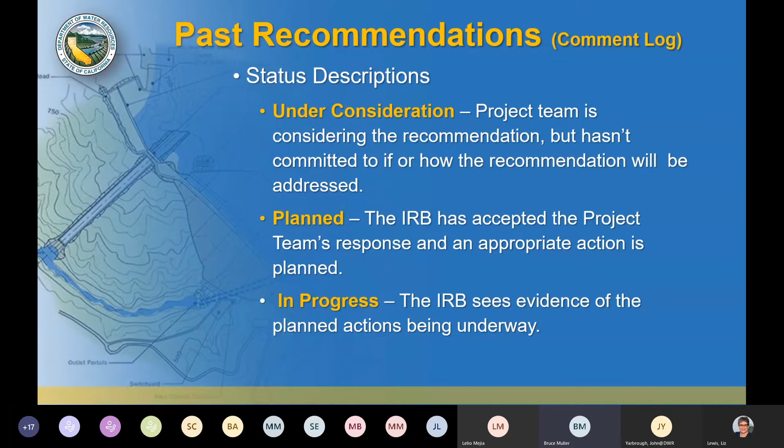Next slide. If we've closed it, then the IRB has reviewed and confirmed that the project team's planned action has been completed and adequately addressed.

If it's not adopted, that's just an indication that the project team didn't adopt the recommendation and has provided some sort of an explanation or will be providing an explanation.

I think there were a few in this category that the scope of the analyses were well beyond what could be accomplished under the CNA study, and so those have been queued up to be, they're underway, but they just won't have the results in time to be incorporated into this particular report.

And then finally, we had one that we classified as superseded simply because we wanted to clarify a prior recommendation. So next slide.

So here's the quick summary. We don't include the recommendations from IRB number 8 because the project team hasn't had a chance to respond to those yet, as they just got our report.

And so you can see overall, we're pretty pleased on the IRB to see that out of 73 recommendations through IRB number 7, 53 of those we've actually considered to be closed. 13 in progress, a couple planned, no longer have any that we would consider under consideration other than those that were made in IRB number 8.

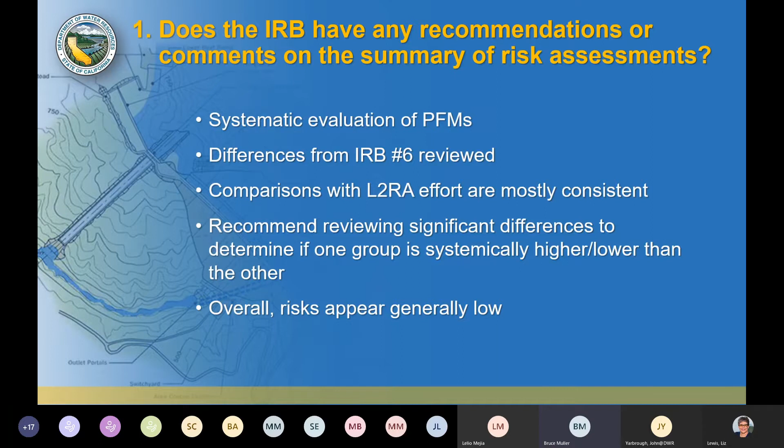Second question that was asked is, does the IRB have any recommendations or comments on the status of reports? First of all, just general comments. We certainly appreciate the use of color to identify the potential failure modes and risk levels and where they fall.

We asked the team to reconsider the use of the term recommended measures, as it might convey a level of definitiveness that from what we heard was actually not intended. And then we suggested identifying documents and data sources that were used to characterize the existing conditions.

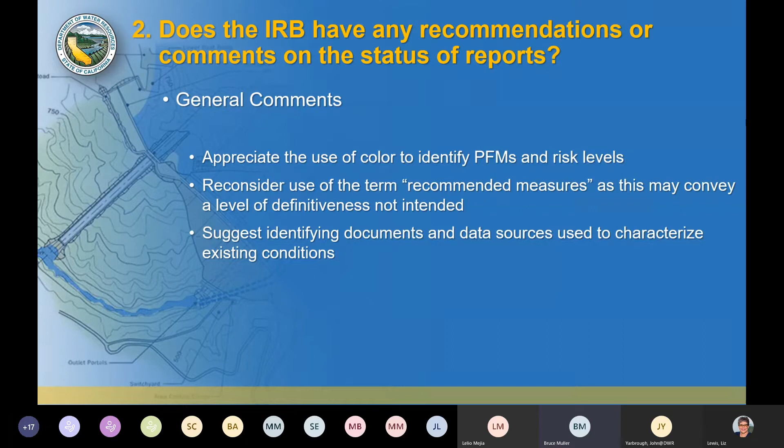In terms of the public draft report, as of, let's see, I think even as of today, we've only seen a draft of the table of contents on the public report. But from that, it appears that it's got the appropriate content. We just recommended that they include a discussion of risk and what's called ALARP, or as low as reasonably practicable, principles, so that there would be some context for anybody reading that report.

In terms of the final overall project report, we felt like the report was in an advanced stage of preparation. We did have a number of editorial comments that we provided separately, mostly things that we didn't feel rose to the level of being in our formal report, but we saw it as an opportunity for the team to clean some things up.

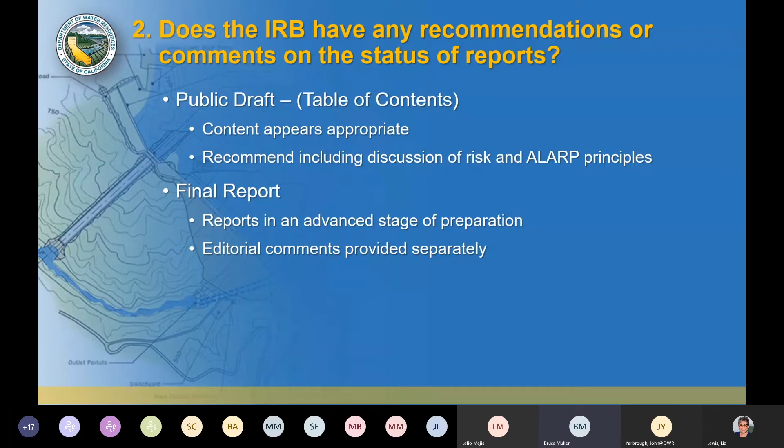All right, on the task 1 report, this is the emergency spillway task. We indicated that emphasis should be added regarding the importance of the Hyatt power plant. The issue here is that operation of the emergency spillway potentially could lead to a backwater effect that would essentially require the closure of the outlets at Hyatt—and that's your emergency evacuation for the reservoir.

The task 4 report, this is the various low-level outlets at the dam. We indicated there's a need to emphasize the role of a low-level outlet in reducing risk for all PFMs. In essence, having low-level outlets provides an opportunity to intervene in most of the other potential failure modes if they were to begin to show signs.

We also thought it was important to identify that the existing low-level outlet capacity does not meet DSOD guidelines. I will, however, qualify that by the fact that the DSOD guidelines currently apply to new dams. So while they're commonly applied to new dams, Oroville has never been tested by a significant seismic event, and so it might be desirable or prudent to meet the guidelines.

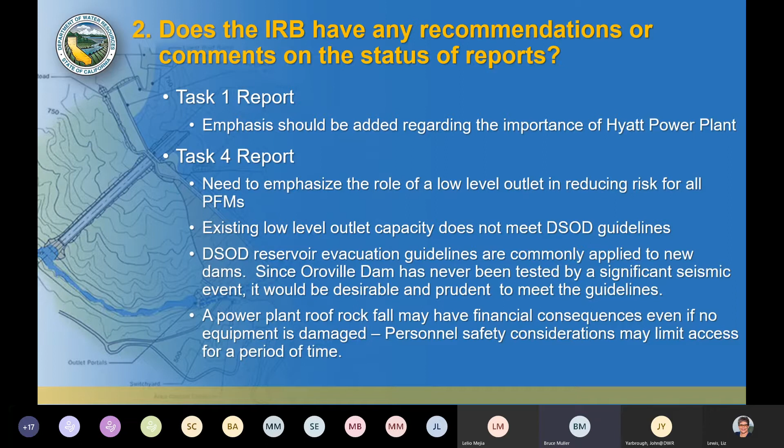The Task 5 report, which is the embankments. This was again one of the areas where we wanted to see the studies identified that contributed to the CNA study. One example of that would be the study of the vegetated area.

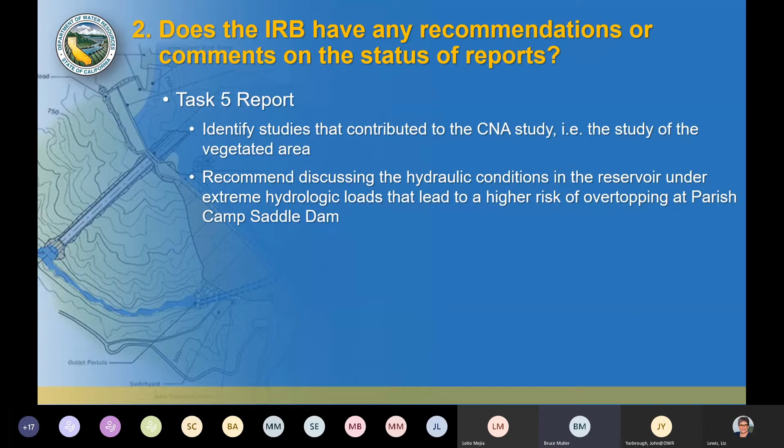We recommended some discussion of the hydraulic conditions in the reservoir under extreme hydrologic loads, because there's a unique phenomena that occurs in the arm of the reservoir by Parish Camp Saddle Dam, whereby it's possible that in that arm, due to flow conditions, the reservoir could actually be about a foot higher than at the main dam itself. That's something that'll come into play as you hear some more of the presentations today.

The third question that was asked of us was, does the IRB have any recommendations or comments on alternative plan formulation and recommendations? We felt DWR had used a good structured process for formulating alternative plans. We supported their effectiveness scoring approach. In essence, this is just a way to go through the alternative plans and give them weighted scores according to their objectives.

We suggested that instead of trying to whittle it down to just a few alternatives presented to decision makers, we thought the objectives and consequences are so diverse that it would be important to present the DWR decision makers with the full suite of plans that had been formulated, in order to allow for a more rich set of choices going forward.

And in IRB number 7, we recommended expedited implementation of some of the low-cost measures that were part of all alternative plans. Specifically, this was a group of about 3 measures that had been recommended that were relatively low cost, where implementing them could actually be maybe even less than further studies, or if not less, certainly not much more than the cost of doing additional studies on these measures.

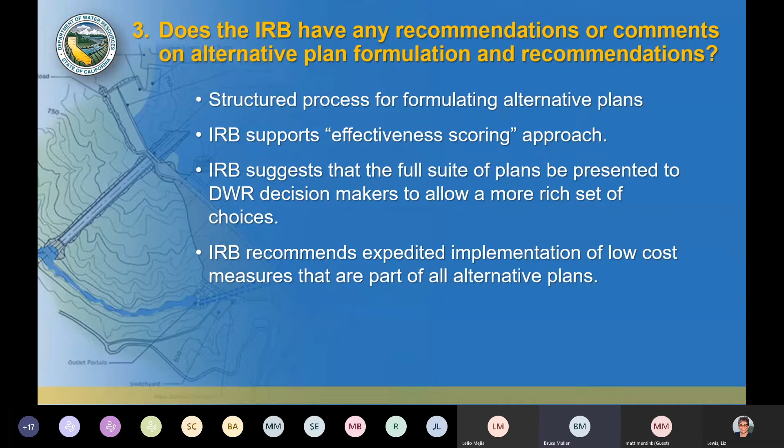The fourth question was, did we have any recommendations or comments on the comment log? And as usual, we updated it and provided that.

There was one item of note, that from the first IRB meeting, recommendation number 16, the climate change studies won't be ready for inclusion in the CNA. Our suggestion was that the discussion in the CNA really focus on how climate change would be addressed as plans or measures were advanced. Just giving some context of how that would be done would certainly be helpful.

Did we have any recommendations or comments on the schedule and next steps, which we did not.

Does the IRB have any other recommendations or comments, kind of the general catch-all? We saw this as an extraordinary effort to process a large number of potential failure modes, risk reduction measures, and alternative plans.

We really felt that DWR has created for themselves a model that could be used for other facilities. The reports they're developing provide the framework from which they can take a good, solid look at all of their facilities. But at the same time, not everything needs to be done to the same scale that it's been done for Oroville.

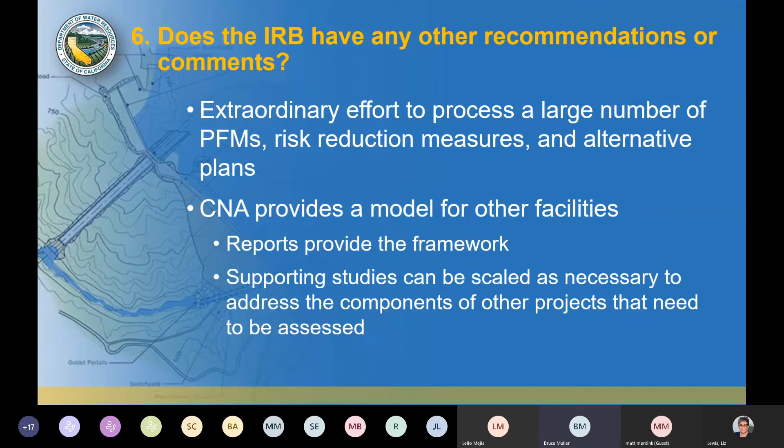And I think we would concur. I don't think we saw any of those 11 that we felt should have been incorporated into plans.

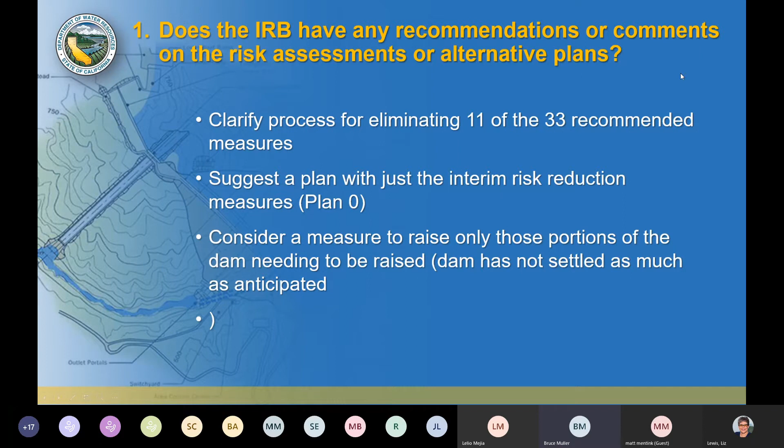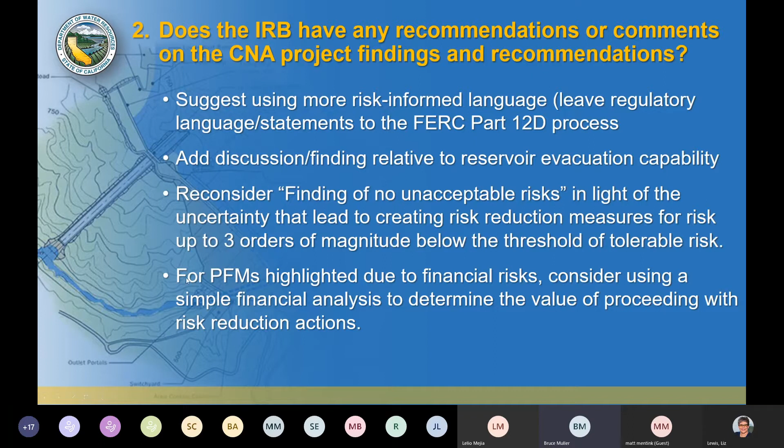Did we have any recommendations or comments on the comment log? We reviewed the master comment log and updated it with the status, then provided that to DWR. Next slide. Did we have any recommendations or comments on the reports?

Again, this is just about explaining it. We think it makes complete sense that primarily the risks are coming from life safety and financial consequence, and so those are the things that really stand out in the report. But we think it's just as important to indicate why some of the other consequence categories don't show risks that are anywhere near as high as these.

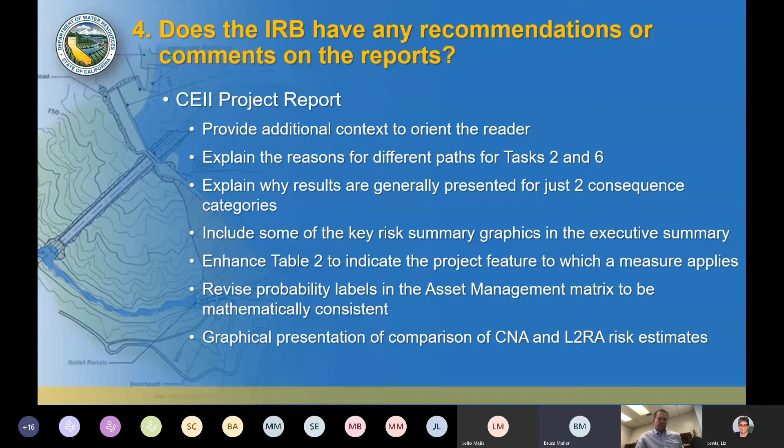And then we also asked for a graphical presentation of the comparison of the CNA and the Level 2 risk assessment risk estimates. We had seen that in an earlier meeting. We thought that was extremely useful, but we did not see that in the draft reports that we had available to review. Next slide.

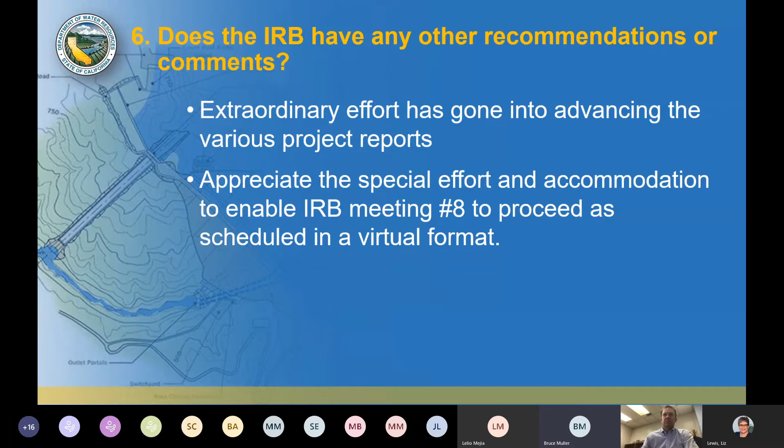And with that, that's the end of our report. Certainly open to questions. Maybe one question. I understand that Rune had submitted some questions to DWR either late yesterday or this morning. And while most of those questions, I think, really apply directly to DWR to answer, I think there was one in there, or several of them, that alluded to the notion of a factor of safety.

And I would just caution everybody to be very careful with the notion of a factor of safety. I've seen many cases in dam safety where when you begin to really look at things in a risk context, you start asking many more questions than are asked through standard deterministic analyses that lead to factors of safety. And you can make errors both ways with factors of safety, because in a large number of cases where factors of safety are computed, they are only computed for those things that we know how to analyze. And it's a significant risk to believe that just because somebody has computed a factor of safety, that is adequate for a full understanding of the risks posed by a dam.

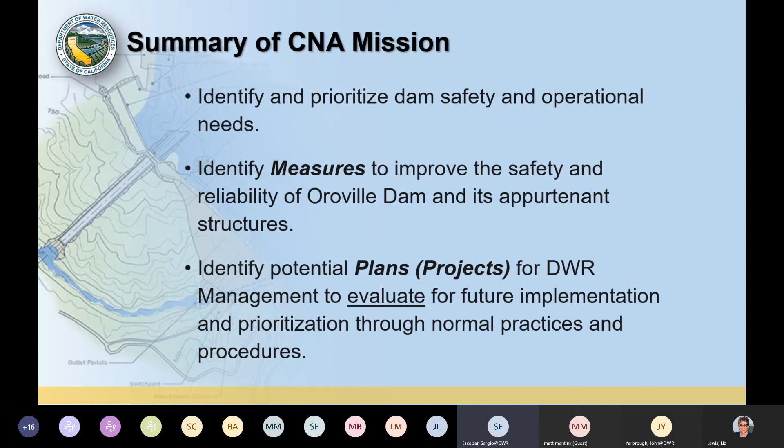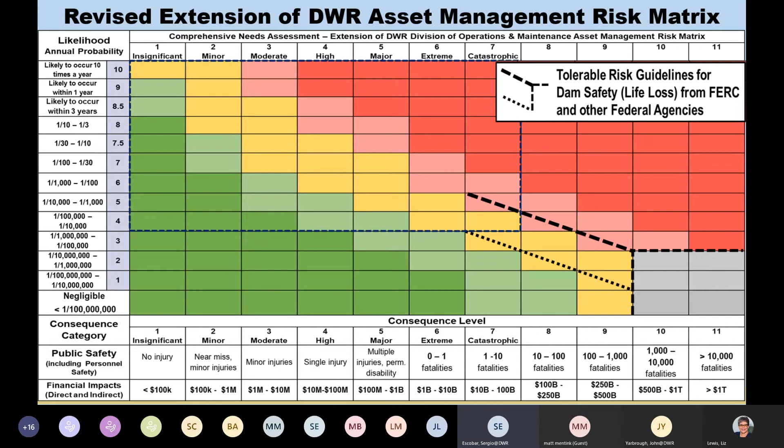So these are our final results from all of our work. We ended up doing a full analysis on 129 PFMs. 54 of those, approximately 42%, plotted in the negligible line. Additionally, the IRB for meeting number 8 asked us to separate those failure modes that were financial and those that were life-loss oriented. Out of the 129, 105 were dominated by life loss, and 24 were basically financial.

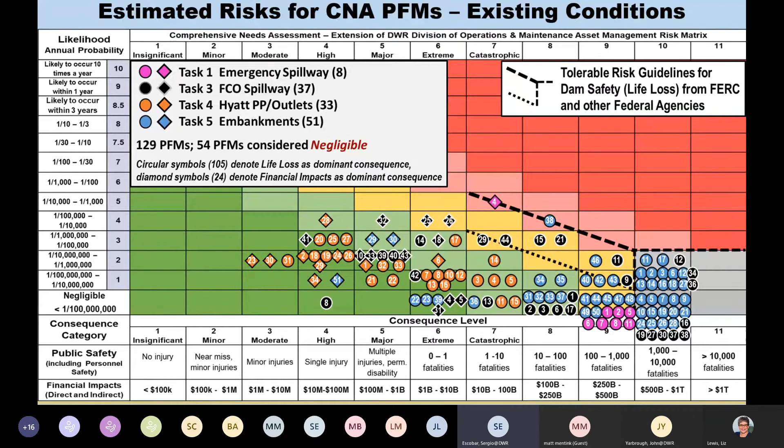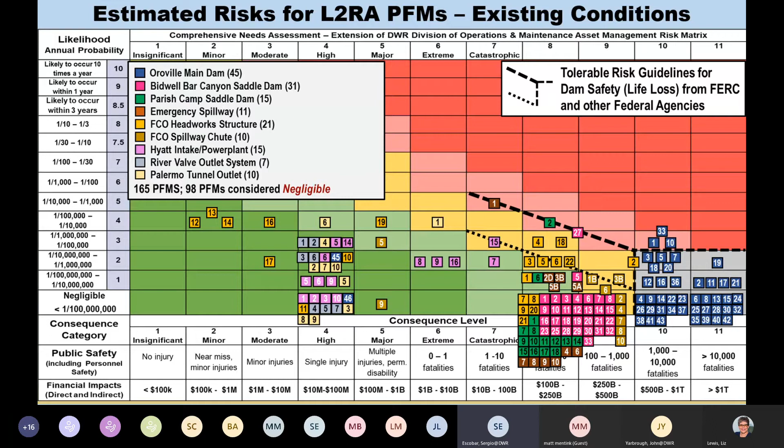Next slide. Now moving on to the measures, we used a total of 31 failure modes, or potential failure modes, to develop our measures. 33 measures were developed as a result of these 31 failure modes that were used.

Next slide. So what were our major findings? Number one, no dam safety deficiencies were identified - these were FERC and DSOD standards. From speaking with the regulators, I think they're changing this standard a little, so my next slide reflects what our wording is going to be changed to going forward, per IRB meeting number 8 comment.

Secondly, for a handful of PFMs that are the highest, additional analysis is required. One of these is the flood control outlet structural analysis. That analysis actually started before the CNA started, and it's expected to be completed either the latter part of this year or early 2021. As soon as that information comes in, we'll be able to go back and look at what those results tell us in terms of any potential deficiencies on the structure.

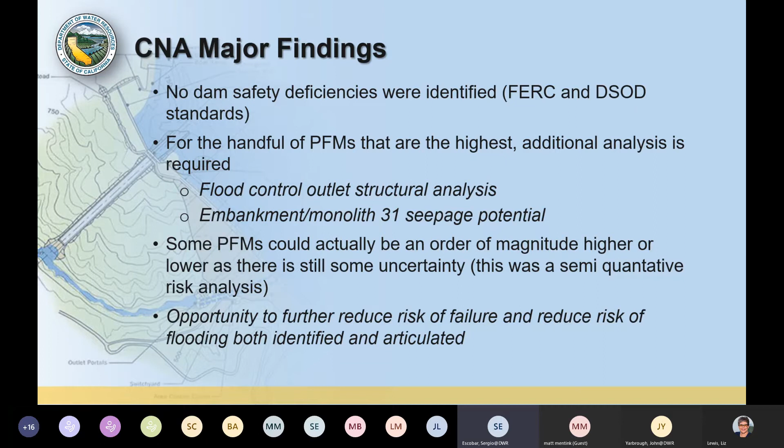So after meeting number 8, our revised dam safety finding language is going to change to read: all of the risk estimates made by the CNA teams fell into either broadly acceptable or tolerable risk zones. No unacceptable risk. Those that might fall above the tolerable risk line were identified. As a result, no dam safety issues were identified that exhibit a need for immediate risk reduction actions.

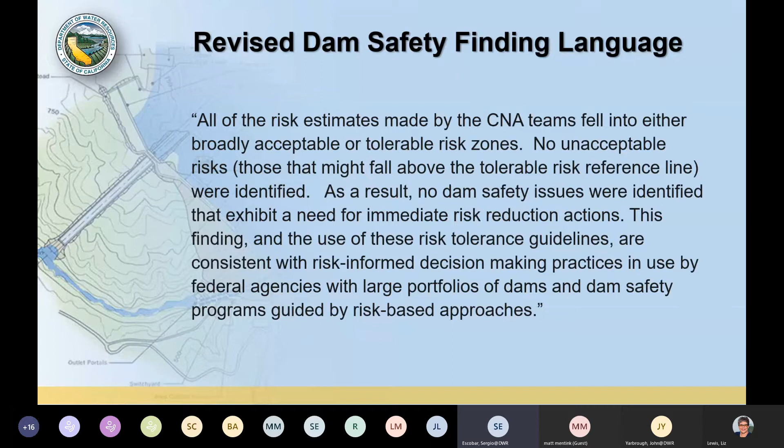This finding and the use of the risk tolerance guidelines are consistent with risk-informed decision-making practices in use by federal agencies with a large portfolio of dams, and dam safety programs guided by risk-based processes or approaches. As some of you may know, DWR also has a portfolio of dams, so we are fully embracing this statement that we have no dam safety issues that need immediate risk reduction actions.

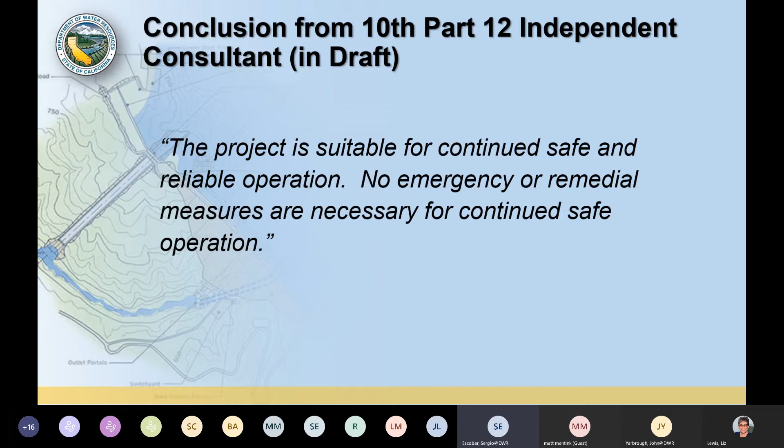Next slide, please. So now I'm going to touch on how we formulated the alternative plans.

We held a total of 3 workshops to formulate, create, evaluate, and refine these plans. We first started off with an early IRB recommendation, and that was to build the plans based on themes. We built them taking into account the 33 measures that were developed as part of our process.

Through a series of workshops, there were a number of measures that the teams, or the group that consisted of approximately 20, didn't feel deserved to be incorporated or would address that particular thing. So we ended up eliminating some measures due to that.

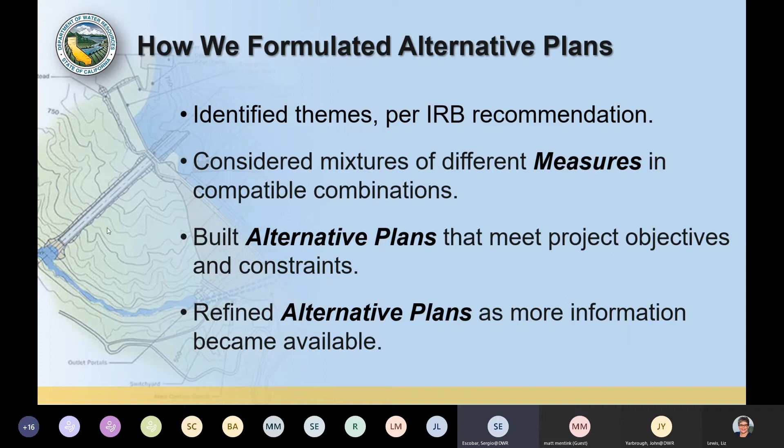We went ahead and built these plans also to meet the objectives and constraints that were identified early on, and then we went ahead and refined the plans. Next slide, please.

So we needed a way to weigh the plans. One of the things that we looked at was 3 criteria. Most importantly, does it achieve risk reduction, residual risk? Secondly, does it promote resiliency? The prepare, absorb, recover, and adapt is, in essence, what the Corps of Engineers uses when it comes to resiliency. And then with any project, we need to use good engineering.

We do not want to recommend something where the risks are greater than the benefits. So this is the criteria that was used to weigh the plans. Next slide, please.

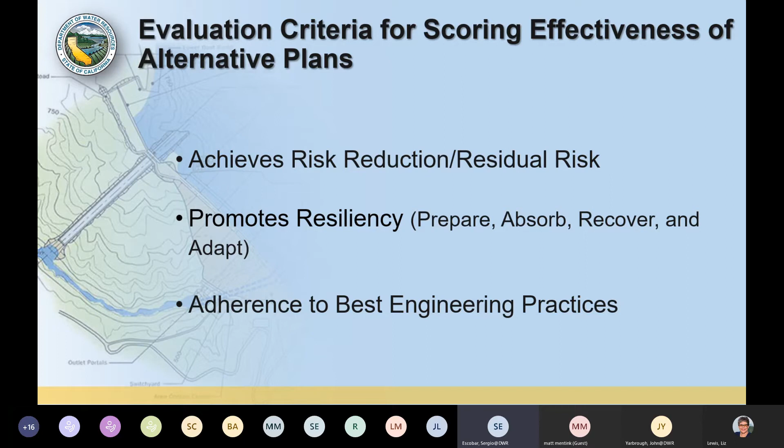So here's a list of our plans. We ended up with a total of 10 plans, and again, the total weighted benefit at the bottom only takes into account the 3 scoring criteria. It does not account for or include cost or any other information that would be used to prioritize these plans.

So with respect to the weighted score, for the most part, the first 6 plans all score relatively close to one another, and I think that could be expected, given that it's a semi-quantitative risk analysis. In order to put refinement on this, as I mentioned, we will need to do additional studies, some field work, and prepare a feasibility study with a quantitative analysis.

The other item that I would like to point out to the group here: 5 of the 33 measures are common to all of the plans. David Sarkeesian is going to speak to some of these that we're going to implement in the near future.

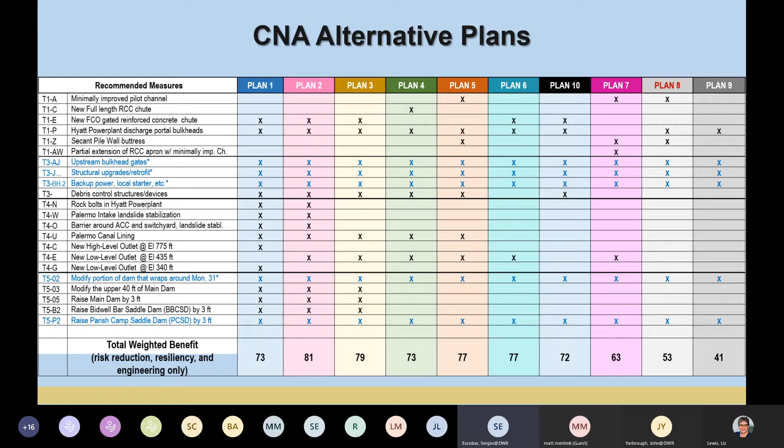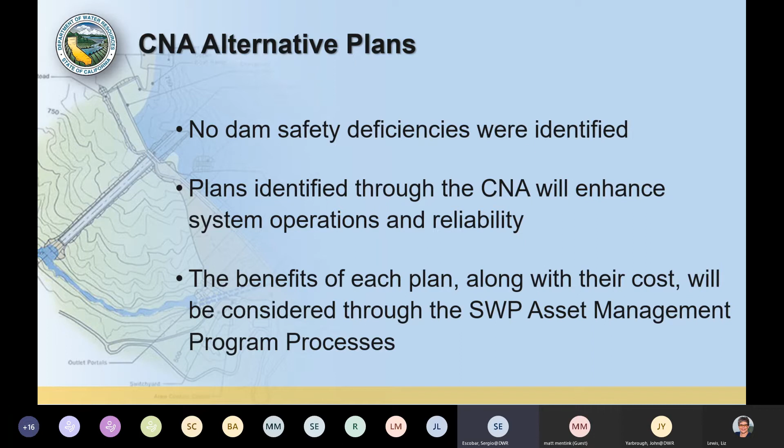Any questions? Sergio? Yes, what's the time frame on the evaluation and determination of the selection by senior management on the plans?

I'll defer that to Ted. We're scheduled to complete our work now at the end of August, and I think as part of this evaluation, we're going to look at the portfolio across the State Water Project. So, maybe I'll stop there and let Ted continue.

Thank you. Yeah, hi, good morning, Matt. This is Ted. Are you able to hear me? I am, thank you.

Oh, very good. Yeah, so maybe to answer your question, the next couple of presentations we have were intended to help describe the process we'll go through to start initiating work on some of the measures identified. Some of the measures are studies that will require further work. So if it makes sense, Matt, maybe we can walk through those and then see if that helped address your question, and then talk more at the conclusion.

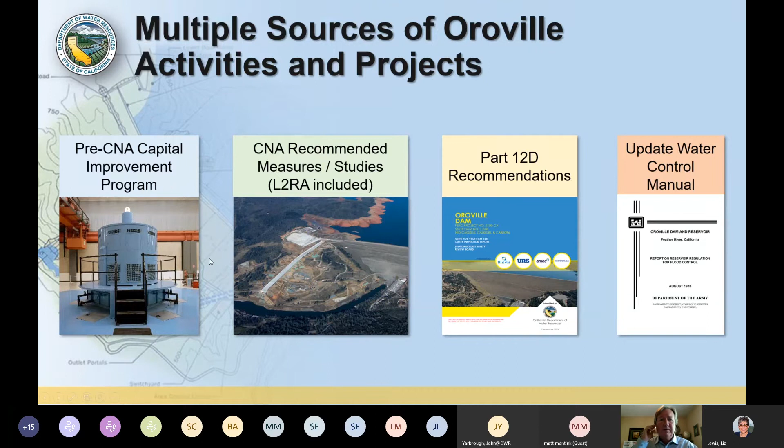So this slide is similar to the past one, but presenting those major tracks in a little bit different view. One thing I forgot to mention on the prior slide is, in addition to those four major assessment tracks for the Oroville facilities, we also have our routine maintenance activities that occur too. As we plan out work across the State Water Project in the Oroville facilities, we break them into two types of work in terms of our budget planning and work planning. We characterize one as our regular maintenance activity, and then as there's special projects done, we plan those differently because there are additional things we're doing beyond our regular maintenance plans that do work across the State Water Project. So we're focused on these special efforts that we do as part of the facility upgrades and refurbishments and modernization efforts.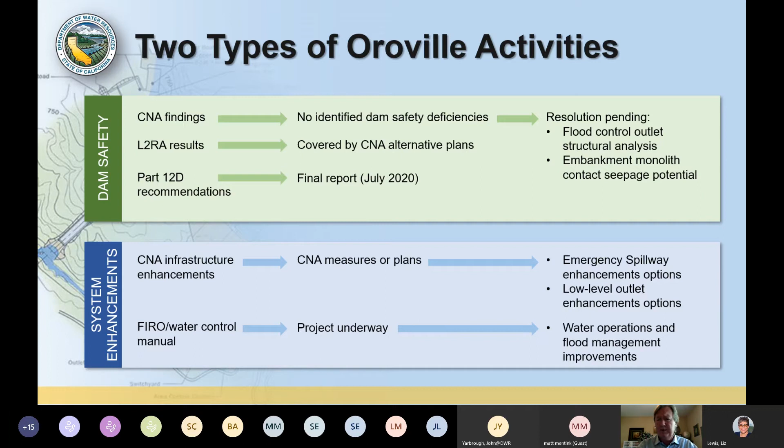And then that kind of is the segue. We are showing the track for the flood control manual update that's underway as well.

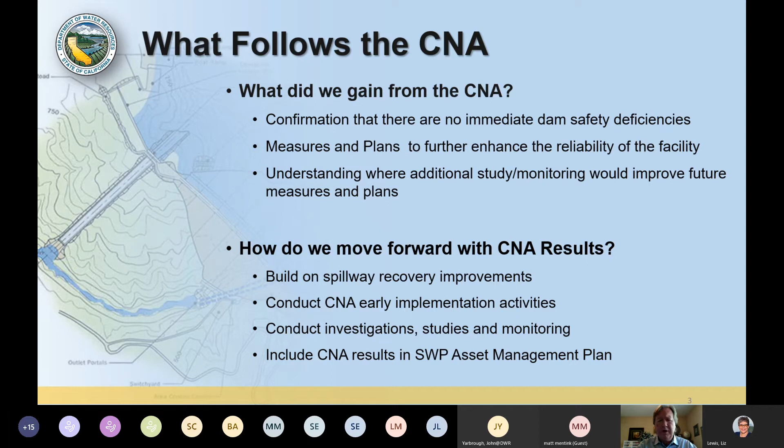I wonder, John, and the group, if it makes sense to move into David Sarkissian's presentation prior to questions, just because I think he's going to add a lot of detail to this overview, but I'm definitely open for questions as well at this time.

Okay, I think, Liz, did we get any questions in the chat? We did not. Okay, well, let's go ahead.

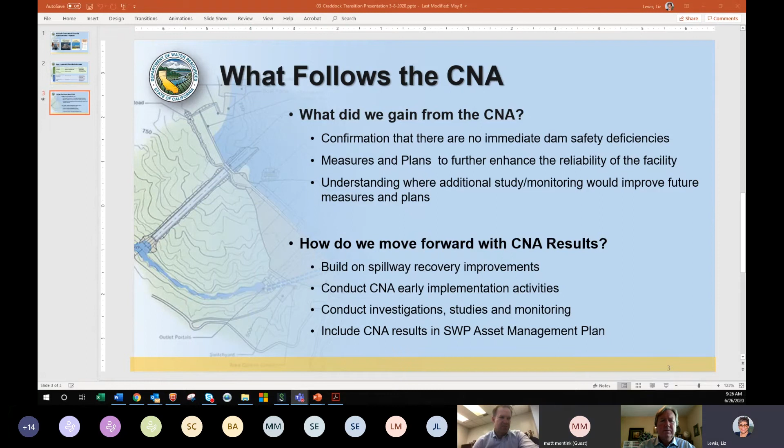I think that makes sense to dive into Ted's— so we'll proceed doing that. Of course, if you have a question, take yourself off mute and let us know, or send us a note in the chat. But while that's going on, let's get Dave set up here. Dave, why don't you take us away in the next presentation, because I do think that's going to elaborate on the direction that Ted just laid out.

Sure, can you hear me okay? Yeah. So, okay, thank you very much, great. Ted, and take it away.

Okay, thank you, John. I've got some more detail, maybe more tangible information on efforts moving forward, and really where Mr. Craddock left off in terms of prioritizing our work in the context of risk is where we're heading. It's helping us tremendously because we have a large body of work within our State Water Project dam safety program alone, and with all the other State Water Project assets—the aqueduct, pipelines, plants—there's a body of work there too. Our effort here, led by our asset management program, is to identify the risks and prioritize our work so we're reducing risk across all the assets, with public safety as our driving goal.

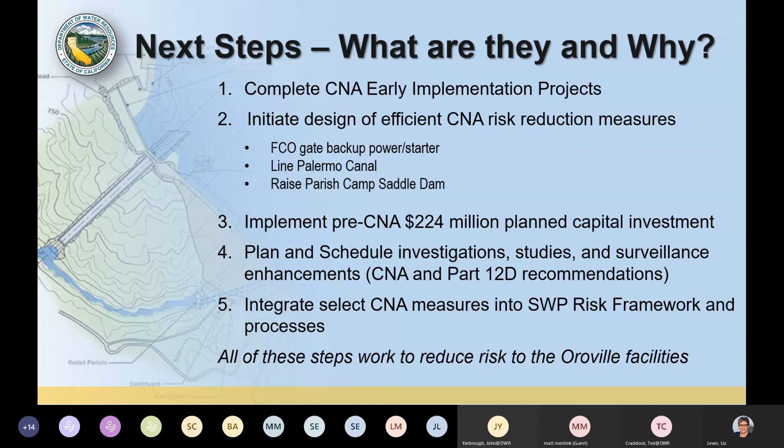And lastly, I'll touch upon integrating select CNA measures into the State Water Project risk framework and processes, and kind of how we do that. So all these steps, although they have different time frames, they all work to reduce risk at the Oroville facilities. Next slide, Liz.

So the first early implementation project I wanted to give you an update on was the installation of new piezometers at the Oroville Main Dam at the downstream toe, and these have been installed. In fact, I think they may have the automated real-time instrumentation installed within them as well. Why did we do that? Well, it was identified as an action that made a very sensible investment to enhance our surveillance, in particular for internal erosion-related potential failure modes.

These piezometers will inform the ongoing seepage analyses and modeling. And we have that toe seepage weir—these piezometers will be an additional way to understand how seepage is occurring and collecting at the toe of the dam. In the profile there, you can see kind of the internal seepage pool. A couple of piezometers went through that and went to the foundation, and then we've got a couple downstream of that barrier, that little internal barrier dam, Zone 1A and Zone 2A. This is really going to help us, particularly with the modeling that's underway, to discern between foundation seepage and seepage that's collected behind that barrier.

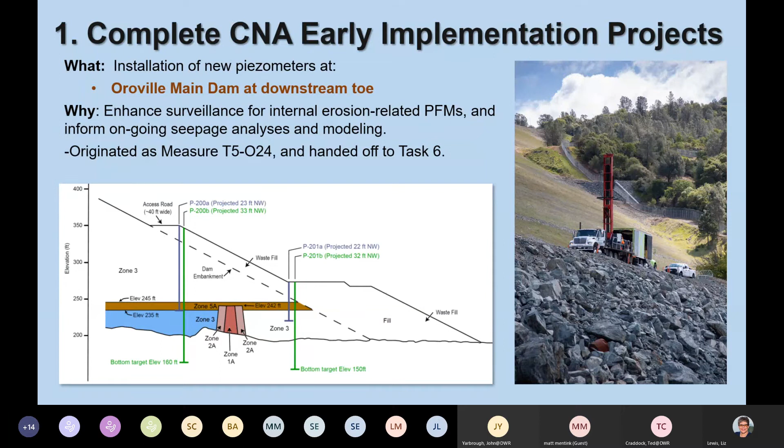Just to note that this originated as a measure out of Task 5, which was the embankments, and through the CNA process, handed off to Task 6 that was dealing with instrumentation, and then advanced to completion with the good advice of the IRB. If we could advance. Dave?

Sure. Are you gathering data from that already? And if so, is it telling us the efficiency of the collection weir, or lack of efficiency?

Well, I'd say I haven't seen the data personally. I know Dr. Harder's seen some of it. I wouldn't say that the seepage weir is inefficient. I think yes, we have low seepage, but this is going to help us understand why that is. Okay. And so, more to come—in fact, as we meet down the road, that'll be something we could share, what we're seeing.

Thank you. Sure. The next early implementation project is the proposed installation of new piezometers in the main dam in the grout and core block galleries. Why do we want to do this? We want to replace, in some cases, original instrumentation, but then also enhance monitoring of foundation-related internal erosion potential failure modes. The graphic there shows you, in general sense, some of the installations that are proposed.

We've submitted our plan to FERC and DSOD, and we're expecting some technical comments, so we'll have to work through the comments. Potentially, just based on kind of workflow, I'm seeing this potentially as something that actually gets installed in 2021, just based on the time it takes to get through comments.

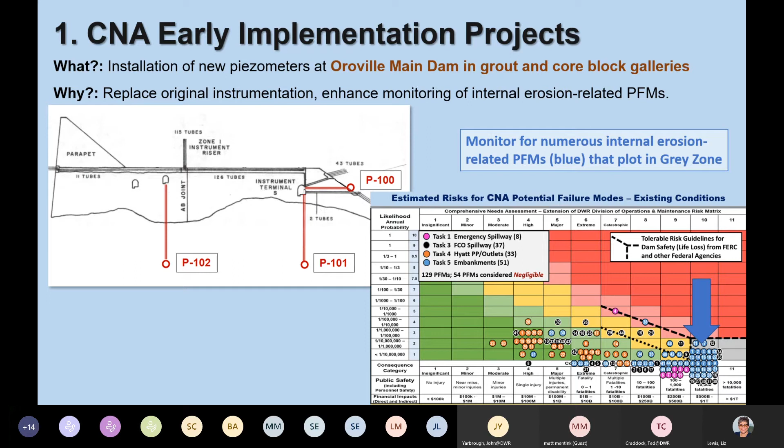Another one: installation of new piezometers at the flood control outlet headwork structure foundation. This was identified by Task 3, dealing with the FCO, and advanced to Task 6 dealing with instrumentation. Why do we want to do it? We want to replace original instrumentation, monitor uplift pressures to inform those ongoing analyses of the FCO, and it'll give us a good understanding of the grout curtain performance. This entails drilling through the piers at an angle to install piezometers right below the foundation of the structure.

Those are really going to be helpful in the stability analyses, and specifically, you can see that failure mode 11 in the black bubble, T3-11. So this is a measure to monitor that very potential failure mode. We have received both FERC and DSOD approval, and we are working to get this work scheduled in August, when the lake's already below 813, so the lake's receding. That was one of the criteria we wanted to have when we install these, with no water against the structure. We're looking forward to getting these installed, and we'll learn a lot from this.

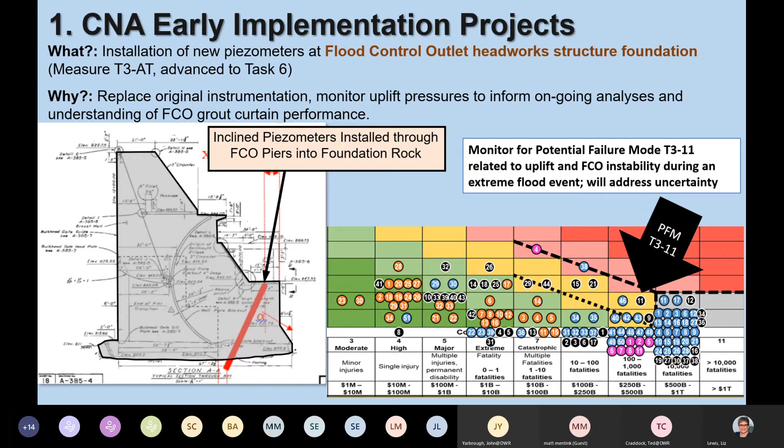So the second grouping: initiate design of efficient CNA measures. This was another area where the IRB really helped us and pointed out that these are some measures that are common to your plans. They make sense, they don't need more study. We don't need another 3 years of studies to make decisions on things like this. So we concur, these are items that we want to pursue, and start initiating that process of design and get them into our plan. Each of these I'll speak a little bit more to in the upcoming slides, but I just wanted to revisit how these show across multiple plans.

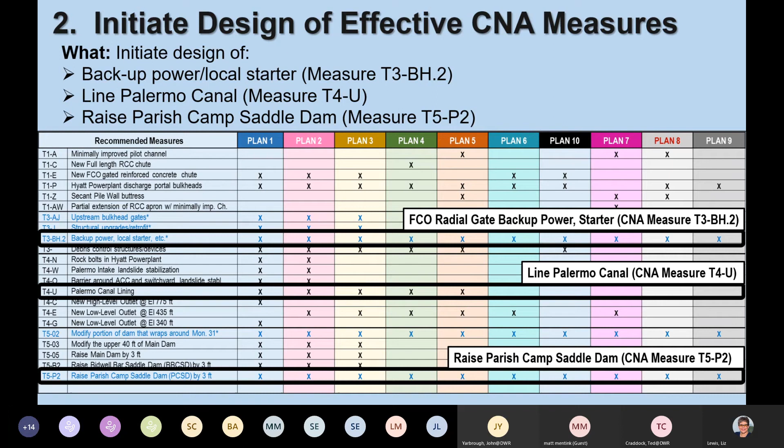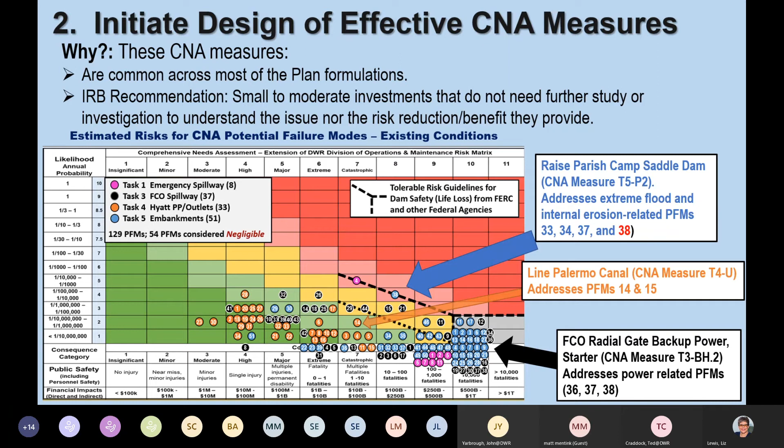And that's, I think, part of the thinking of why these are prudent things to move forward with. In orange, you can see the lining of Palermo Canal addresses a couple there. And then FCO radial gate backup power starter addresses kind of power-related failure modes. With those systems, there are a couple identified there where having a redundant system to the existing redundancy makes sense. So once again, things that don't need further study, things that are significant projects, and they still have to go through the regular processes with the regulators, environmental and CEQA, but things that we look forward to getting started on in the very near future.

So this just demonstrates the risk reduction that these projects can accomplish. I think this does appear in the CNA, maybe the CEII report, just demonstrating how we move these PFMs with these measures. And in this case, they're all moving vertically down, becoming less likely with the implementation of a measure.

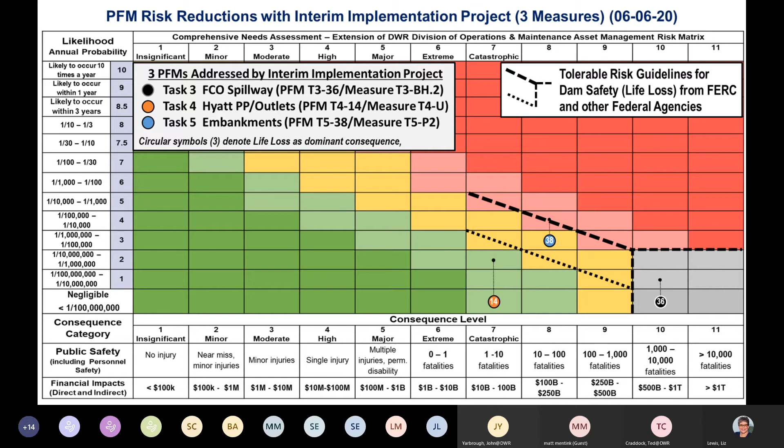So a little bit more information on the radial gate backup power starter measure. We already have redundant multiple sources of power to power these gates, and an existing standby generator. But the concept here is to have a capability to bring in a portable generator and make quick connections to operate these hoists in the event those other systems go down. It's more of an electrical mechanical type project, and it's another way of reducing risk, consistent with the ALARP principles, and something that we've got the internal expertise to pursue.

Let's advance to the next slide.

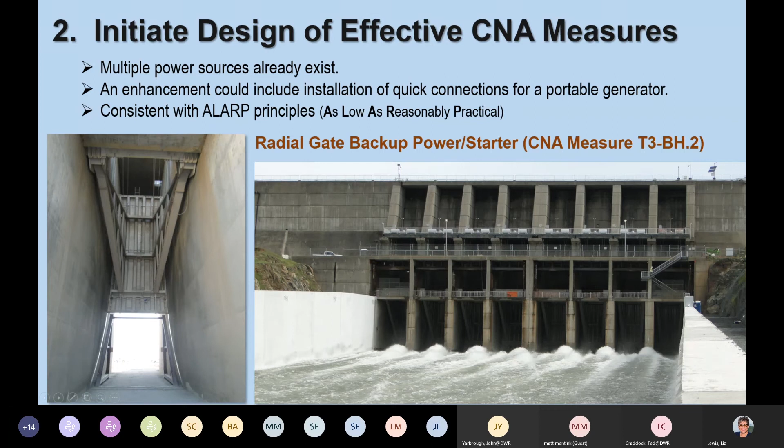So Palermo Canal, and many of you already know, this is an outlet out of the left abutment. The Palermo Tunnel passes through the left abutment, through the rock, and outlets, and when it exits through the abutment it becomes a canal along the side of the hill. Through the process of the CNA and the L2RA, both efforts identified that if this canal failed and the water came spilling down the hill, it could potentially impact the switch yard, and the loss of the switch yard could impact Hyatt. So this is an area that was identified needing a measure, and a very practical and standard measure is to improve the lining of the canal. We've brought this forward as something to initiate design on and pursue in the near future in order to reduce the risk of the loss of the switch yard.

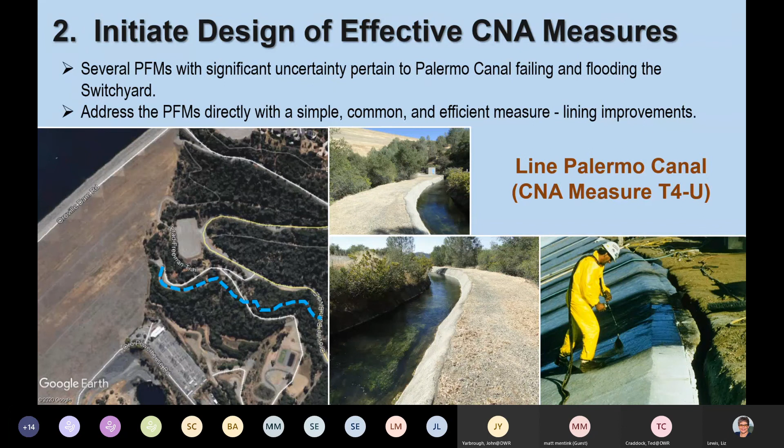If you could advance to the next.

This is in relation to the raising of Parish Camp Saddle Dam. It's in a narrow branch of the reservoir, and it's a relatively small dam, over by Lime Saddle Marina, high up in a saddle. It only sees water at a toe elevation of about 890, so it doesn't see water every year, only maybe every 3 or 4 years when we're really topping out Lake Oroville. But what's unique about Parish is its location, and as Bruce mentioned, the potential for a slightly higher water surface elevation under, for example, a PMF flow.

There are a couple other issues with landslides too that I'll get into, but I just want to note it was one of the highest risks identified, overtopping during an extreme flood. The key is that it's identified for beyond the PMF, and that's one of the unique things about these risk workshops, both L2RA and CNA - they took a look at floods beyond the PMF, talking about greater than 1 in 20,000 annual likelihood. So pretty far out there, extreme loading.

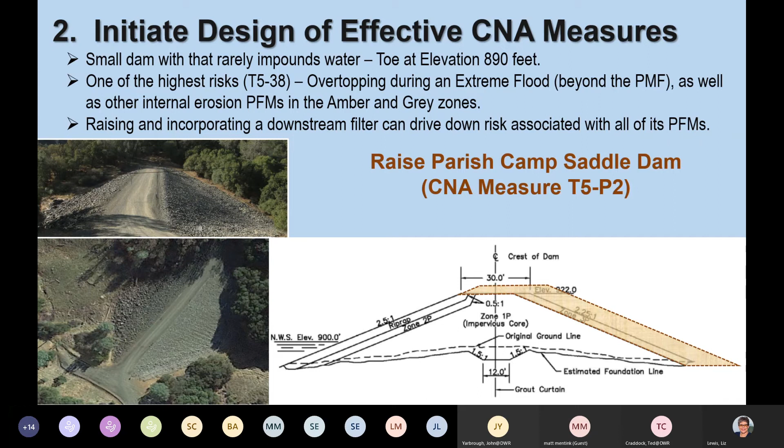When you start looking at those floods, you start obviously getting higher lake elevations, and these things pop up. Besides overtopping, there are also some internal erosion potential failure modes that plotted in the amber and gray zones. Raising the dam and incorporating a downstream filter could drive down risks associated with all of those failure modes. The graphic shows what that might look like - raising the dam a couple feet, adding some downstream filtering on the downstream face of the dam. Let's go to the next slide.

So the third step, we just wanted to touch upon the pre-CNA planned capital investment. We recognize that as maintaining the recently reduced level of risk, as well as driving down pre-CNA and newly identified failure modes, and improving reliability of key dam appurtenances and critical equipment. You can see the distribution of funding over the current and future years, and many of these projects initiated maybe 2016, 2017, 2018, and they've got some pretty long durations.

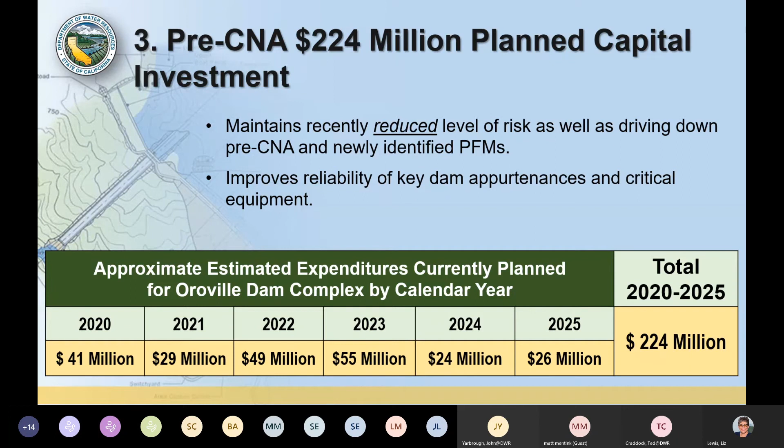Let's go ahead and get to the next slide where we've got a list of over 40 projects - once again, things that were already in our plan prior to CNA. You can see a lot of them relate to Hyatt Power Plant, and of course within a plant, rotating equipment and systems just have a shorter lifespan than, say, earthen embankments or large concrete appurtenant structures, so they require more time or more investment at a shorter time interval.

Ones that are in design phase include the Hyatt Power Plant intake gate refurbishment, as well as penstock inspection and repair. Hyatt Power Plant turbine shutoff valves - that's underway. River valve outlet system upgrades - we've got a package going into FERC and DSOD very soon, probably in July, with some proposed work there. Palermo Tunnel bulkhead emergency closure improvements - we've refurbished that bulkhead and we're looking to get it staged in place this fall, with submittals in with FERC and DSOD for that phase of work. And then some radial gate work - there were some pretty significant maintenance projects following the 2017 event, and we're moving forward with more.

Up in the top on the next column, I mentioned the core block drain hole inspections and cleaning, power line refurbishment, Oroville physical security improvements. That's a lot of new improvements already in place. And while that's more security oriented, from my perspective, anything to protect the dam is, to me, an improvement on the dam safety side as well.

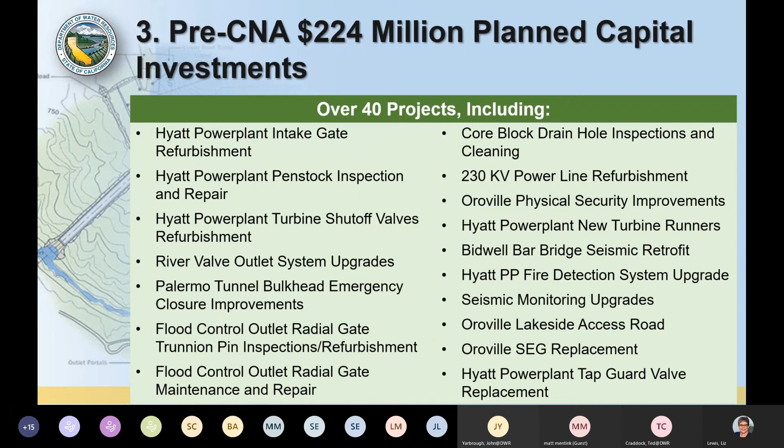The fourth step, which Sergio and Ted mentioned, is investigations, studies, and surveillance enhancements. There's a large body of work there, done to reduce uncertainty. These are areas where both L2RA and the CNA team were making risk estimates, and in some cases they could use more information. The intent of these studies is, in some cases, to rule out hypotheticals, verify conditions, inform other analyses, and enhance decision-making overall.

Some specifics: continue the study of forecast-informed reservoir operations, and stochastic flood modeling with improved inputs from regional precipitation and paleohydrology analyses. We've already started conversations with the Army Corps of Engineers on teaming with them to do that work.

The third bullet: investigate feasibility for sampling and testing of the main dam Zone 1 core for erodibility. We've got some options there in terms of going back to the borrow pit and getting samples and doing some modern testing with that material, and also potentially getting samples from the dam itself.

And then lastly, some investigations, possibly trenching at the interface of the main dam embankment and the spillway monolith 31. That's another one of those risks that plots a little higher, where we need to do more work—validate our understanding of what that construction configuration looks like, validate material properties, and refine our understanding of the failure mode postulated for that location.

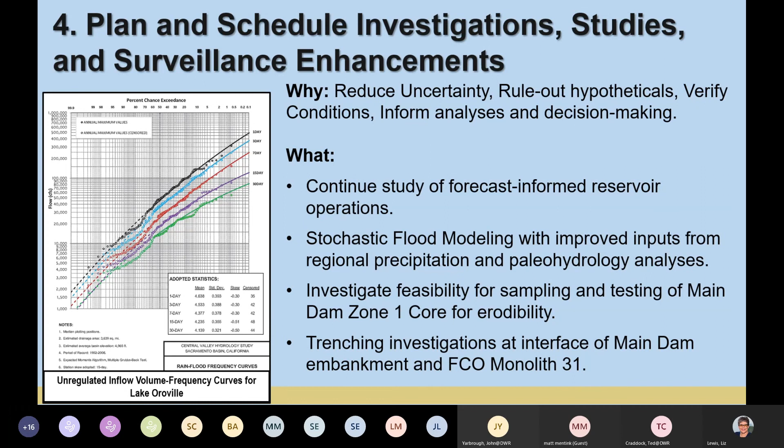But let's advance to the next slide. More studies—we've got plenty of studies.

Evaluating the seismic loadings on the radial gate trunnion anchorages and plans to address aging. With the updated seismic loadings, we're revisiting that topic and teaming with others on researching the aging of these types of installations. There's plenty of work there, and it's not a unique situation for us—a lot of other owners are dealing with the same question, and we're happy to participate in advancing the industry's understanding of these issues.

Reliability assessments—we've done some walk-down level assessments, and there are areas where we could go back in and do a more detailed assessment, really identifying which components, taking the screening results and diving deeper on those that pop up as needing seismic retrofit, like tying down or bolting. We also need further inspection of rock bolts and shotcrete in the crown of Hyatt Power Plant. This is more of a worker safety and operational item—we want to enhance what we're already doing and get a better sense of the condition of those features, and if needed, plan a project to install more or make repairs.

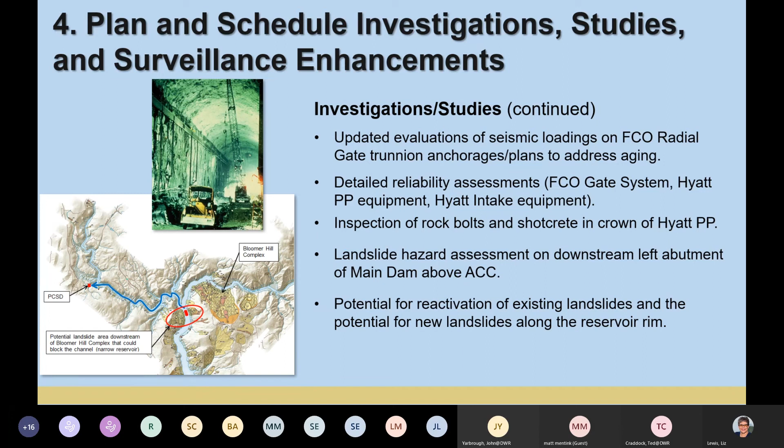We've done quite a number of reconnaissance level assessments of landslides, so the thought here is to really focus in on those landslides that might actually produce that kind of situation, and get a better understanding of their current stability.

In terms of surveillance enhancements, another early implementation project is to do a better effort and implement new technologies in terms of survey of the embankments. That could include high-density LiDAR or even satellite-based surveys of the embankments, getting a baseline here in the next year, and then doing that at some periodic effort or after an earthquake or after a large hydrologic event.

Looking for any sort of deformation or movements, both through the exposed portions and also some bathymetric surveys.

Also installing a new accelerometer on the FCO crest. There's some inspections that have been identified. An example is the 24-inch air intake that accommodates displaced air from penstock numbers 1 and 2. And then wherever we're installing new instrumentation, we're working towards making it automated in real time where it's appropriate.

Through the spillway recovery efforts, the majority of instrumentation that went in was provided that sort of capability. So we're looking to, as we move forward with more instrumentation, add it to that existing platform, and really position us for just better surveillance.

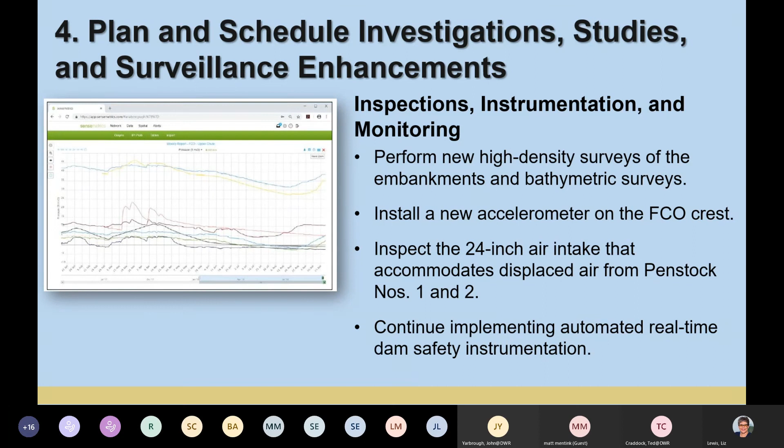This slide addresses the ongoing efforts on the FCO, the flood control outlet structure. That is an area that we're still working on. As Sergio mentioned, we're looking forward to results towards the end of this year or early 2021 of the baseline conditions, particularly in terms of how it performs under various seismic loading.

These efforts started in late 2017 and into 2018 using some two-dimensional linear elastic models, and the recommendation was made to do more advanced modeling, so that's what we've been working on. In the middle there, you can see the model with the various components in different colors, and the far right picture is an example, very exaggerated, of displacements under seismic loading.

It's a tremendous model. A lot of energy and time has been invested in it. You might recall the performance-based testing and flow-induced monitoring that was conducted during the commissioning in 2019. We had a professor actually monitor how that structure performs under those loadings, and then use that information to help calibrate this model.

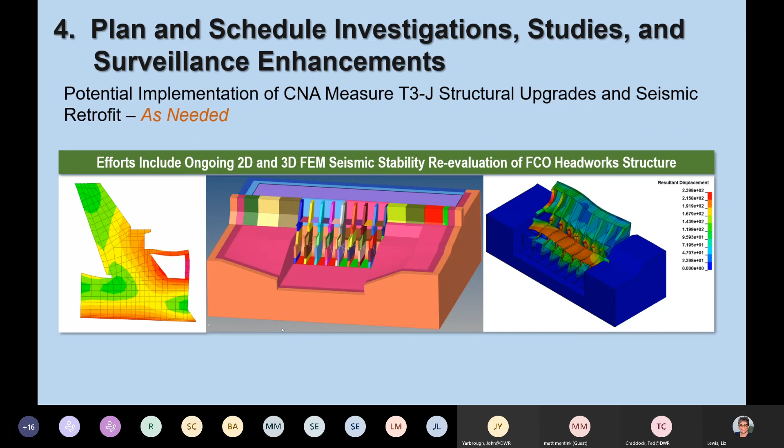So once again, why integration? You've heard it from us many times about integrating these measures into our existing processes. A big part of that is because no dam safety deficiencies or issues identified require immediate action in this risk context. So it allows us to take this information, these measures coming out of CNA, bring it into all the other projects and issues we have within our dam safety program, the other 25 state water project dams.

Help us prioritize them within that program, and then that group of projects and measures, really prioritized at the program level with myself and my staff, feed up to the larger suite of state water project issues, things coming from the aqueduct, the pipeline issues, plant issues, and make sure that across all the assets, we're looking at all those risks, and putting our resources and energy towards the highest risks.

And that's just the basic concept of what we're trying to do. CNA, the way that they've prosecuted the work and presented the work, is tremendously helping us to bring that information in and integrate it with all the other activities and proposed work.

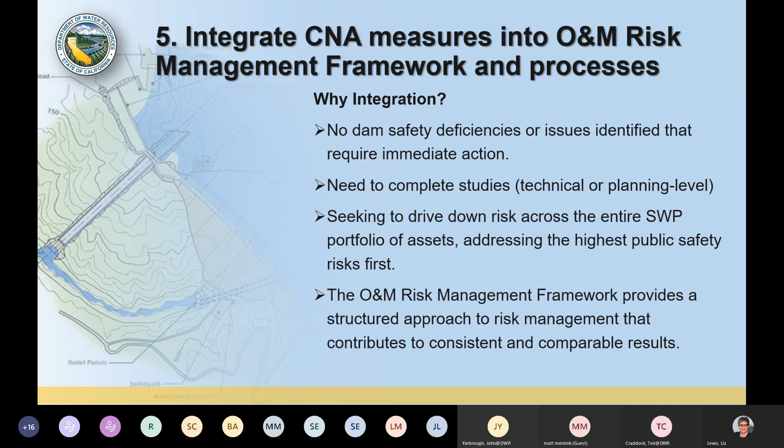As you're working through this process, you need to be communicating and consulting, as well as recording, reporting, monitoring, and reviewing. So it is a living process. There's a lot of back and forth as new information comes in. Each failure mode might need another look, and a risk estimate might change based on the latest study or the latest information.

Next slide. I figured this question might come up: what's going to happen with the other measures that we haven't necessarily spoken to in detail today? Some need those studies and investigations to fill the data gaps and reduce uncertainty.

For some, we need to refine the risks based on new information, and validate treatment measures and verify the risk reduction achieved. In some cases, that might mean holding another workshop and doing a deeper dive on an issue-specific risk. And then, of course, include the measures and projects into our risk management process and register for planning and design, capturing it and revisiting on an annual basis where it fits within our planning efforts.

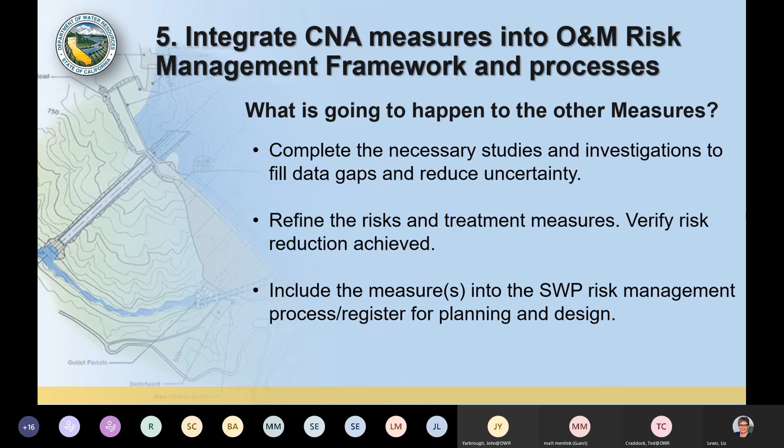And the last slide - this was our thinking that, as I understand Sergio, or as John mentioned, we'd have another ad hoc meeting. But beyond that, we thought that the Oroville Citizens Advisory Commission would be the venue to share progress.